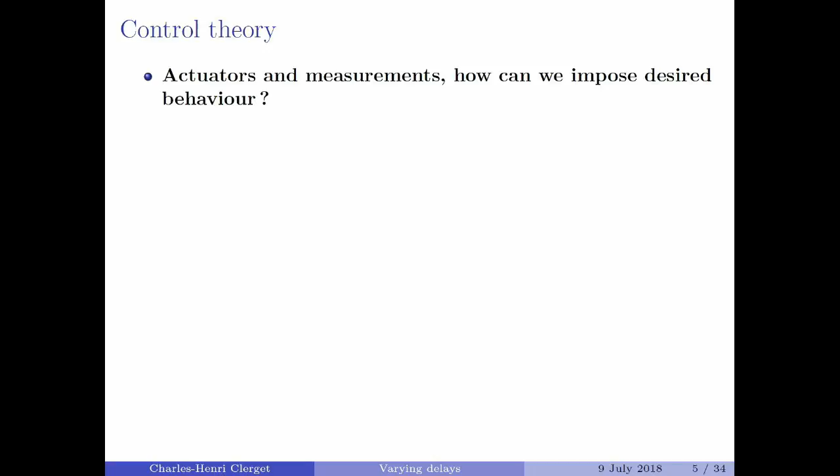So first, a word about control theory. The purpose of control theory is that given a system - maybe a machine, maybe a chemical process, maybe a spacecraft, there can be many different applications - we're given actuators, which are devices that generate some signal we can more or less freely choose. We have some measurements about some states of the system, and the question we're asking ourselves is how can we impose a desired behavior on the system based on that.

Most standard control theory is based on systems modeled dynamically through systems of differential equations, so this is going to be my choice of variables, and these notations are going to be standard throughout the talk. I'll come back to that a bit later. There's a bit of a clash with what you're used to, but for me, x is the state variable, describing the state of the system, and u is the control variable, my leverage, my degree of freedom to make the system do what I want it to do. So this is the most standard formulation.

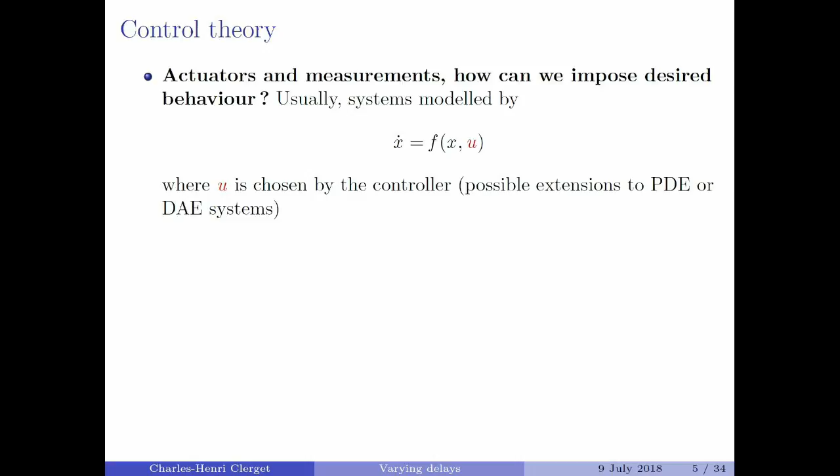There are actually extensions of control theory to systems ruled by PDE equations, for instance wave equations. There's a lot of work on control of systems with hyperbolic PDE equation systems, or DAE systems - differential algebraic equations - which are systems where some of the variables are related to the differential variables through static relations.

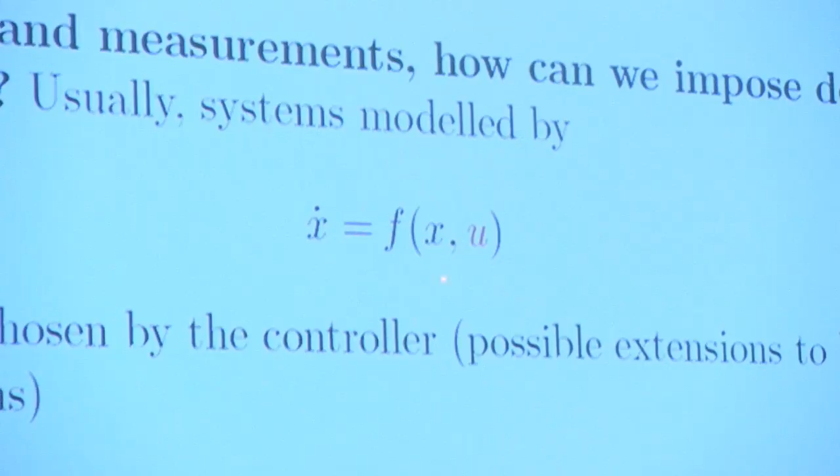So we are trying to stabilize the system only by moving the cart. Obviously, if everything starts in a vertical way, then this is an equilibrium point, but it's very unstable. As soon as we lose perfect symmetry of the system, the perturbation is going to expand, and it's just going to fall down. So in this video, they are regulating it to force it to stabilize the position, and as soon as they turn off the controller, everything falls down because this is an unstable system. This is the kind of thing we more generally try to achieve.

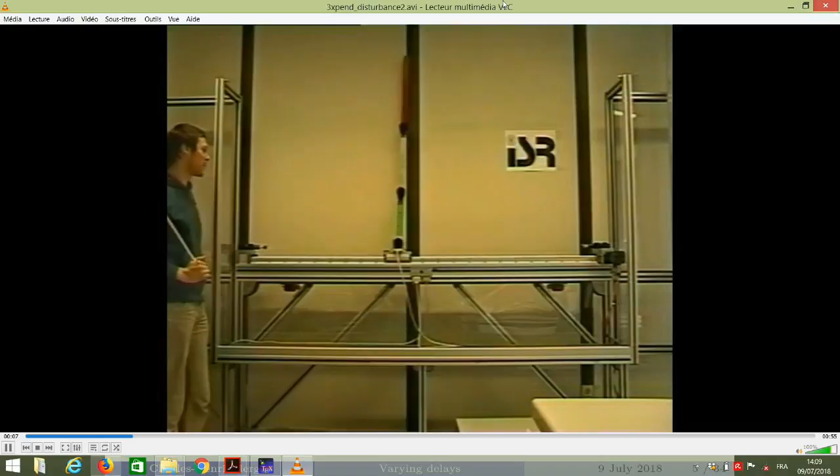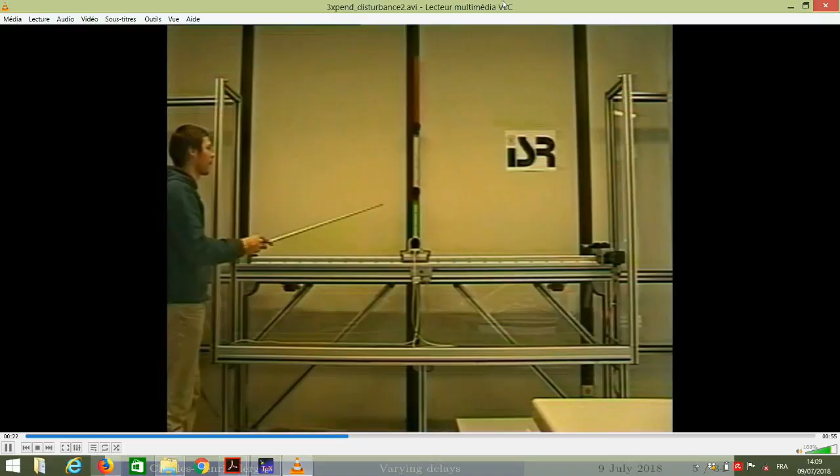Another important question is, we are able to regulate to a given set point, but if we have exterior perturbation or some bias, can we actually correct them? In this example, the researcher imposes a perturbation, and the system needs to fight against it to keep things stable, and slowly gets a bias and slowly comes back to its origin, correcting the bias. Depending on whether I'm hitting here, it takes a lot of work to restabilize the system. If I kick here, it's a bit easier.

Now, another kind of problem we are interested in is motion planning. The problem here is, given a desired trajectory, not a set point, that I'd like to impose onto the system, what is a control trajectory that will allow me to get that?

This is a video from my lab, actually from 20 years ago, where they built this machine which basically inverts the dynamical equation of a robot actuated through 3 motorized linkages, and puts the pendulum in an upside position and keeps it stably there. So these are the main ingredients in control theory.

We could also ask some more fundamental questions, such as, is the system commandable, is it observable, and so on, but I won't dive too much into this today.

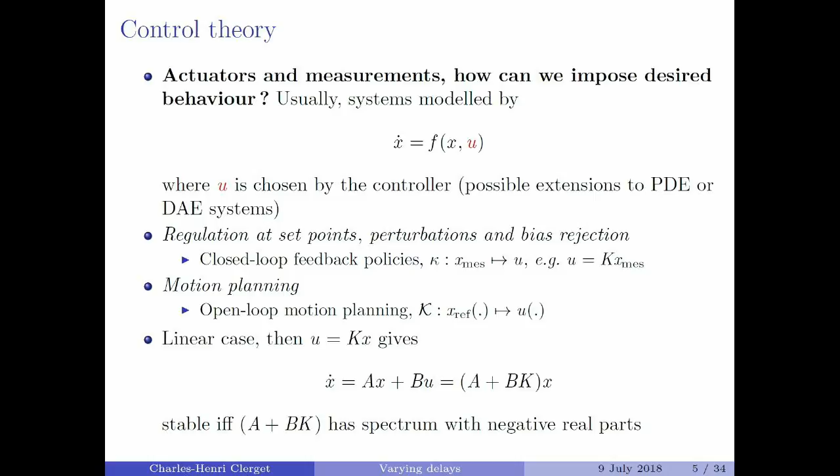To make things a bit more mathematically grounded, let's say the simplest example we could think of is if our system is a linear system, which we usually write like this. So we have linear dynamics with respect to the state and with respect to the command.

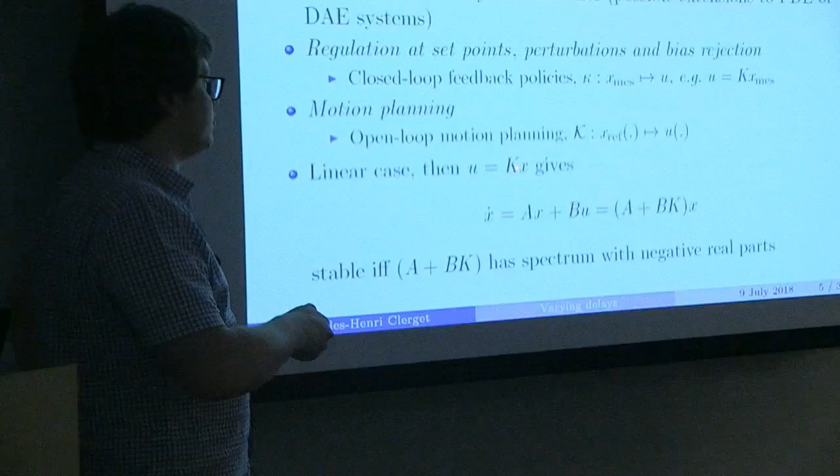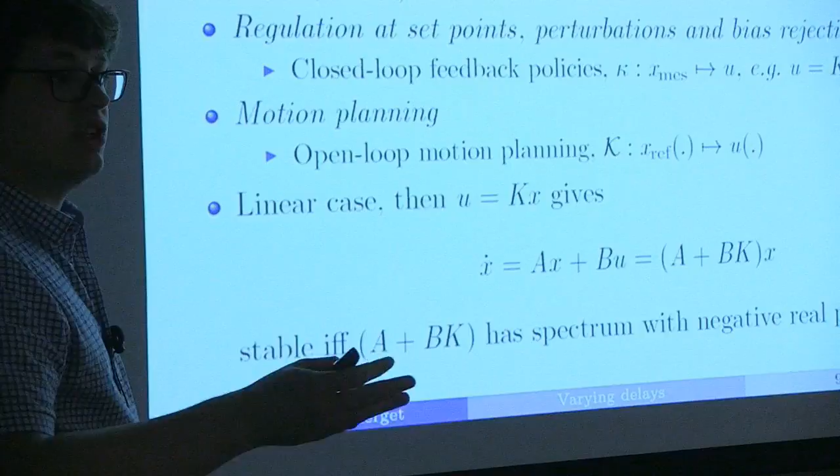Then we try to come up with a linear feedback law. That is to say, the mapping from the measurement I get from my system, to the control action I must take to compensate for whatever discrepancy I find between what I want to achieve and what is actually realized. When we plug that back into the dynamics equation, we get this.

We can very easily see that this system with the linear feedback is stable if and only if this matrix has eigenvalues which have negative, and actually better, strictly negative real parts.

Okay, now I think I don't have any movies, so I can stay here. So this was the general setting.

As I mentioned, control theory is used in many applications. The most notorious ones are probably military applications related to missile guidance, this kind of things, robotics, machine tools, and so on. Another major area of application is control and dynamic optimization of industrial processes.

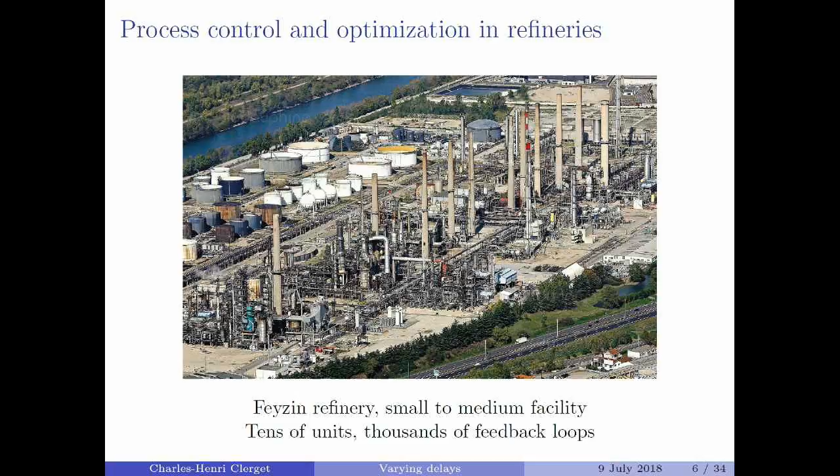In process industry, basically the rule of the game is that you are making commodities out of commodities. Your volumes are huge, your margins are tiny, tiny, tiny, and so whatever tenth of a percent efficiency you can scrap off will make you rich. These are industries which have invested a lot, and for a long time, in control and optimization of their operations, so it's an interesting playground for people in control theory.

This is a view of the refinery where my operational advisor was located. This is in the south of France, nearby Lyon, so it's a small to medium facility. That means it has tens of units and thousands of feedback loops. It's a pretty complicated system, and a big challenge is to try to control and optimize a system like this, which has a lot of feedback loops within it, recycling streams, so a lot of interactions you need to take into account.

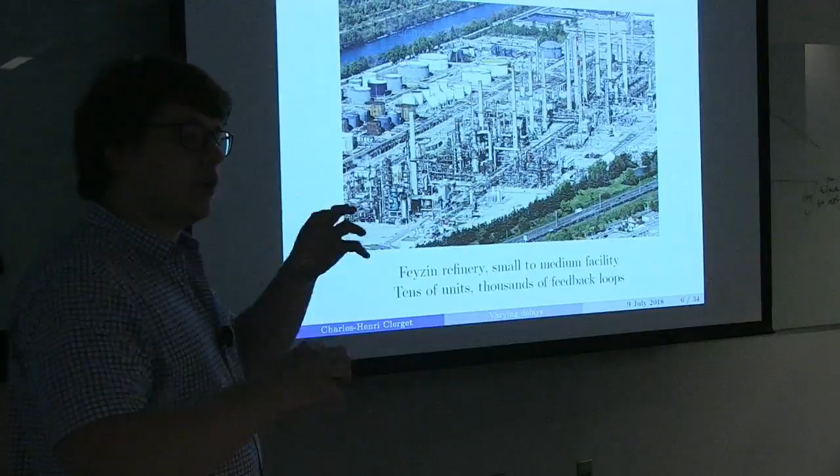And now a word on delay. As I mentioned earlier, my talk will be centered, from the scientific standpoint, on the control system submitted to some specific delays.

The existence of delays - when the ODE ruling the system is actually not an ODE, but rather a delay differential equation - is a pretty old problem in control theory, because you actually find delays in a lot of settings.

Could be computation delays if your controller is a bit slow, could be network communication lags - a lot of instances - and they have a very distinct, actually, have I?

Oh no, okay. That's probably going to be better for everyone, I'm sorry about that.

Delays have a very characteristic effect on dynamics of closed loop systems.

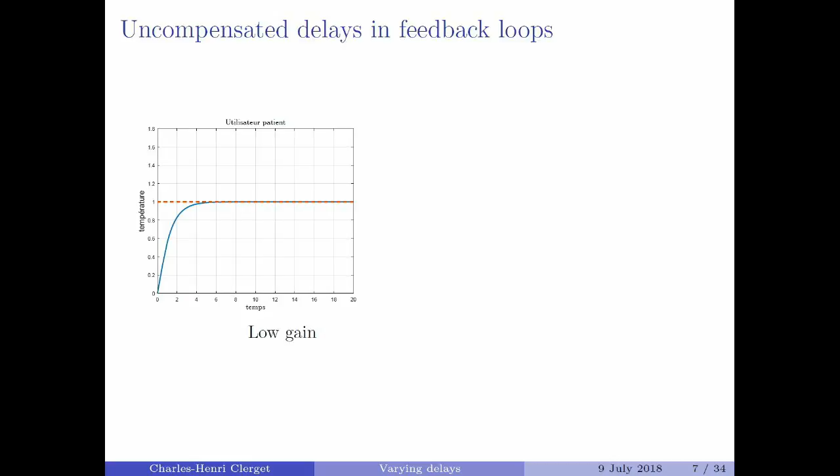So here I've plotted the closed loop evolution of a very simple system where I'm trying to track a target value at 1. In this case I have what we call a low gain. The gain is basically, to make it simple, the proportionality constant between the discrepancy I have on the variables I want to monitor and, based on that, what action I take.

So if I have a high gain for a small discrepancy, I take a big action, and the other way around. Now, as you can see, this works fine, but this is a pretty lame control, actually, in the sense that it takes a lot of time to bring my system up there.

And actually, if you were to look at the equation of the system, there is no real reason to go that slowly. But what I've not told you is that hidden in there is a small delay that I've not accounted for in my control scheme design.

So if I actually try to get my gain larger, to drive my system to the desired reference value faster, then I get this - this sort of spurious oscillatory behavior is very typical of systems with time delays when they are not compensated.

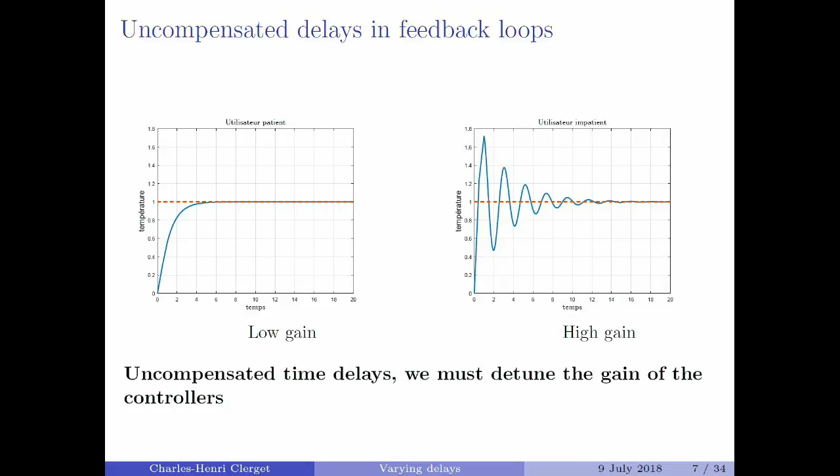So basically the rule for practitioners is that when you have uncompensated time delays in your feedback loops, either you have to live with this kind of spurious oscillation - which we really don't like in process control, because then it excites every other loop in the system and everything starts to oscillate - or you need to detune the gain, and that means you lose performance. So basically all of your controllers are kind of lame, and you have to live with that.

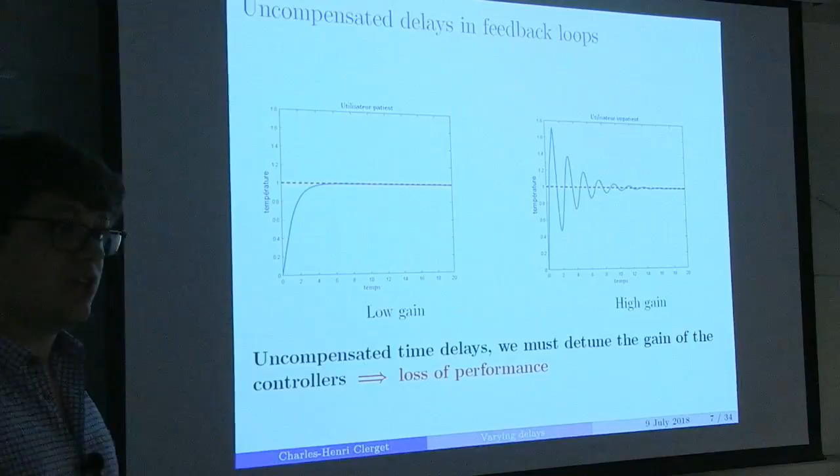And the stake in this talk is for a specific kind of delay that I'm going to detail now - how can we come up with some solution when this delay is complicated to compensate in our feedback.

So, hydraulic delays. Basically what we are talking about today is pipes, essentially. If you look at it from far enough, a refinery is essentially big tanks connected through big pipes.

When the outlet of one tank is the inlet of the next one, this creates - if the pipe is big enough compared to the standard flow rates in the pipe - a transportation delay, which means that what leaves the first tank needs to take some time to go through the pipe and reach the second tank.

And actually, if you look at it from a simplified perspective - that is, if you assume that this transport equation is purely a plug flow model, so an advection equation, can't make it simpler - then you have an analytical solution. In this case, strictly speaking, the action of this transport phenomenon is purely a time delay, whereas the delay itself is a bit complicated.

It's defined implicitly through this integral relation, and this is what we want to be studying today. This is typical of processing plants where we have recycling streams with variable recycling rates, or communication between units which depend on the flow rate at the outlet of one unit. This flow rate is one of the control variables for the upstream unit, but it also affects the communication delays with the downstream units.

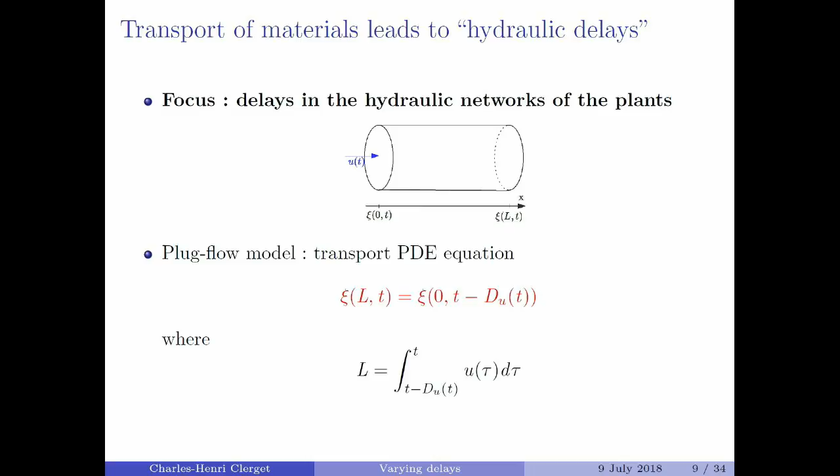This will be made clear when I have the full mathematical formulation, but basically the idea is that our equations are going to encompass some delays, and these delays will be defined through relations of this type.

Before delving into the process side of things, this kind of delay actually happens in other places. Another major application is in engine design, where compared with the speed of the reaction taking place, you have significant delays, for instance, between the combustion chambers and some downstream sensors. So basically you cannot properly control the automated injection.

And an example more up to the point in terms of what Total wants to be doing, another example that could be given and which was studied by a former PhD student in my lab, more than 10 years ago now, is this.

So this is a hydrodesulphurization process. This is basically the process in which the oil refiner takes the sulfur out of the oil, which is what prevents acid rain afterwards. There are very stringent regulations, whether in the US or France, about how much sulfur you can have in the commercial fuel that you sell and eventually burn. This is the kind of unit that helps take that out of your fuel.

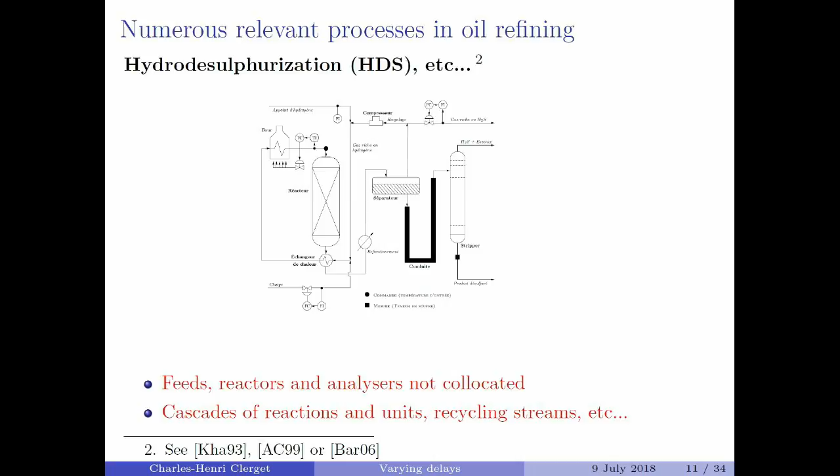As you can see, it's pretty complicated. You have some recycling streams, different units which are, for instance, the separator and the stripper, separated by a significant pipe. We don't measure everything at the same place - some measurements are only done at the end, after significant delays. What's typical in this architecture is that feeds, reactors, and analyzers are not collocated. That means what happens at some point will affect later, after transport, what happens somewhere else, and it might not be measured immediately. Also, as I mentioned, you have cascades of reacting units, recycling streams, and so on.

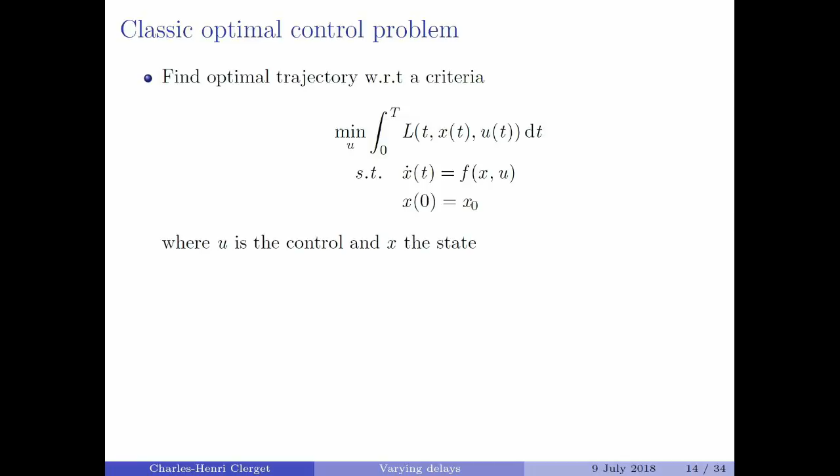Now, more into the mathematical problem statement. First off, there are different ways to go about designing control policies, feedback loops. One of them, which is quite popular for some applications in nonlinear control - what we'd call hard control problems - is called the optimal control problem.

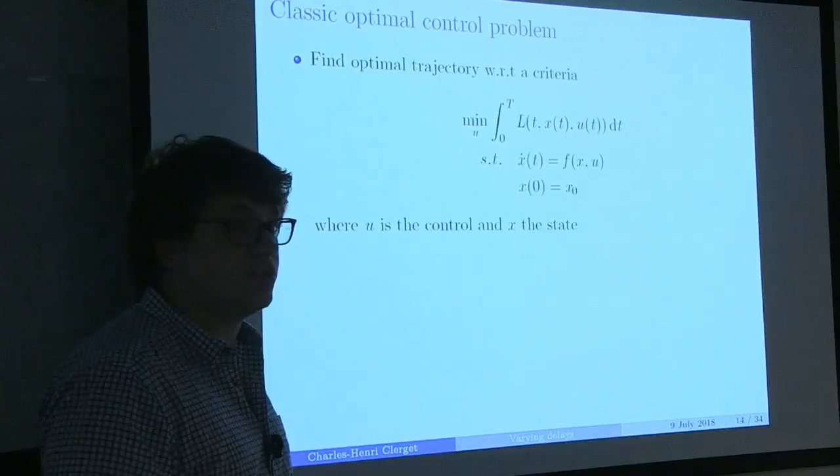I want to pause a moment on this because I think this relates a lot to what you guys do, for instance, in full waveform inversion. In this approach, the way we come up with a control strategy is by solving an optimization problem - we want to minimize over a certain time window a certain criteria which depend on the state and the control input. Usually this L, which doesn't mesh well with what L for you would be, the wave propagation operator - for me I'm going to stick to standard control notation.

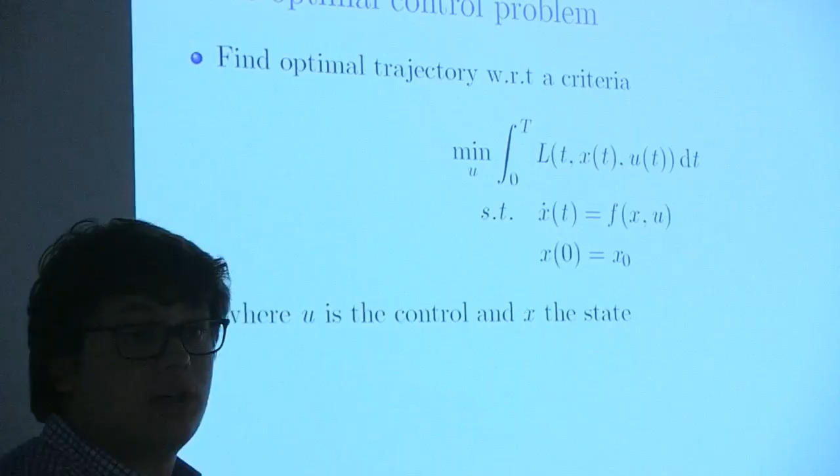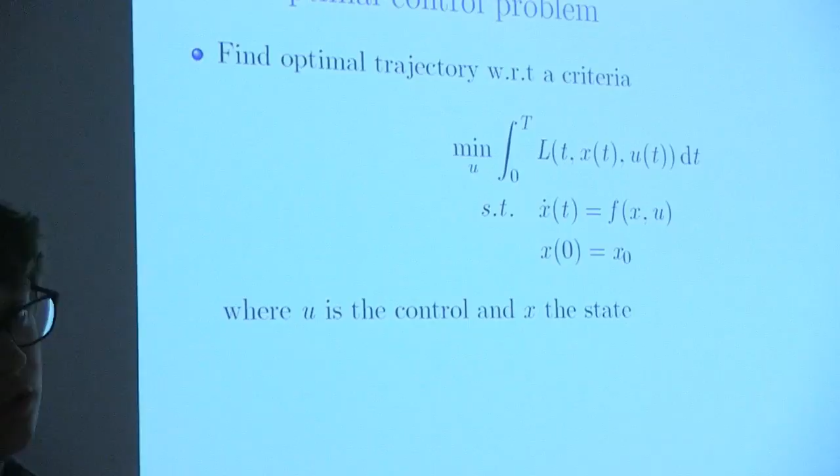Just a comment - the two equations fully define x. Yeah, once u is given, the two equations fully define x. So basically we don't deal with problems that are ill-posed. There's a whole theoretical field in control which studies whether systems are controllable and/or observable, and if they are not, then we just say that's not for us to use.

Your system is misdefined by design, then you need to add more actuators or change the problem - for instance, what could happen is that if you have a simplified model, maybe it will look not controllable or not observable, but if you take into account more complex nonlinear effects, then it becomes so.

But at least we'll go back to, okay, let's sit down again and design a better scheme. So our life is simpler in that sense.

Now, the stationarity condition, basically the condition that a candidate optimum solution of this problem has to verify, is actually, by design, very similar to what you do in FWI.

So you are going to have one equation defining the forward model. Then you have an adjoint equation, which should be familiar to you, and then you have something to which we don't give a name, but which I would call a gradient term. You would see that if you do the scalar product of this thing with the perturbation of control, you would get the sensitivity of the cost, and so at optimum this thing has to be 0.

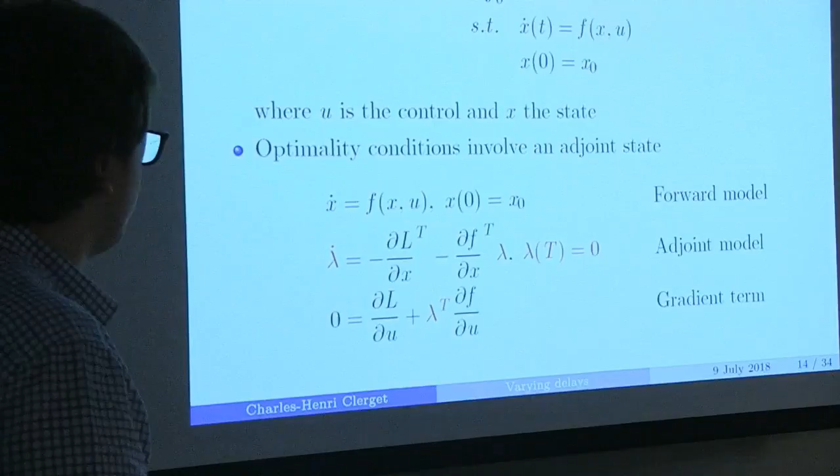So this is pretty similar, and actually I think this theory is what stemmed afterwards what is now used in a lot of data assimilation schemes or FWI, for instance.

Now, specifically for my problem, what we want to be looking at is systems where possibly the dynamics is impacted by delayed value of the states and the command.

We have that this r_u is defined as... is defined through this relation where r_u is equal to the current time minus the delay at this time, which is defined through an integral relation of the type I described earlier. The only difference is that now we take the action of a strictly positive function on the input, to make things a bit more general.

Just a high level question. Whenever you talk about these time delays, the gut reflex is to use Z transform, Laplace transform, Fourier transform, whatever, to account for the time delay. So why can't you do that here?

Because it's only convenient to translate a time delay in the Laplace domain if the time delay is fixed. If it's fixed, then it's really easy. It's just a multiplication by a complex exponential, and then there's a lot of pretty nice theory about that. You see basically what we call the Nyquist diagram turns around, and you can see that when it crosses some points, then you become unstable and such.

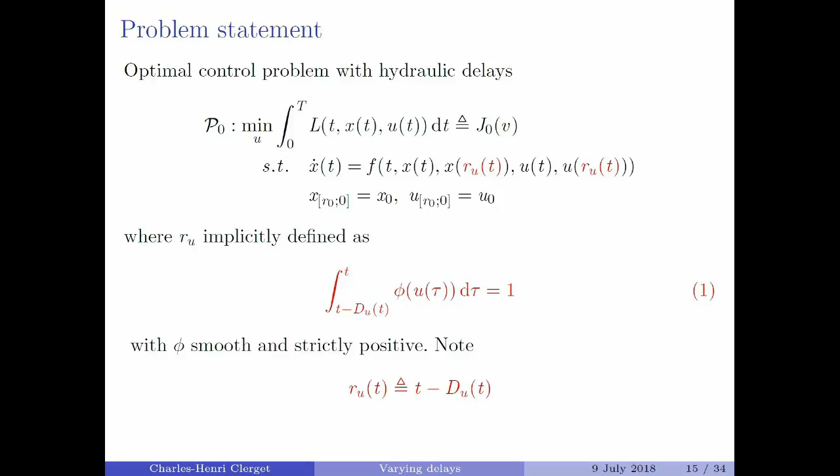Most of what comes next, I will forget about this, because the system we were mostly interested in for what Total was working on was a system where you don't have this, and you only have a delayed input signal and the current input signal.

Now, there are two most traditional ways to solve optimal control problems that are standard in the control literature. One class of families is called indirect methods. These are methods where you start by...

...deriving the stationarity condition of the continuous system. That is basically the stationarity condition that I exposed earlier, and then you try to solve them. You can do it through different ways: gradient descent in the functional space, or if you want to go to second order, shooting methods, continuation methods—there are a whole bunch of them.

It's pretty popular in the control community for, I would say, 3 reasons. First, because it's elegant, which means the math are dirty and complicated, and there's a lot of work to be done there. Second, because they are known, and this is true, to yield very high accuracy, and also because they allow to handle some degenerate problems with singular arcs, which I won't go into the detail of today.

However, when we started working on these problems, the stationarity conditions of this thing had not been investigated for input-dependent delays, so this was a new problem.

The other class of methods are direct methods. Instead of first deriving the stationary conditions and gradient through functional analysis and calculus of variations and then solving that numerically, you first discretize the minimization problem and try to solve it as a nonlinear program, typically using orthogonal collocation methods. This is the method usually preferred in the process systems engineering community.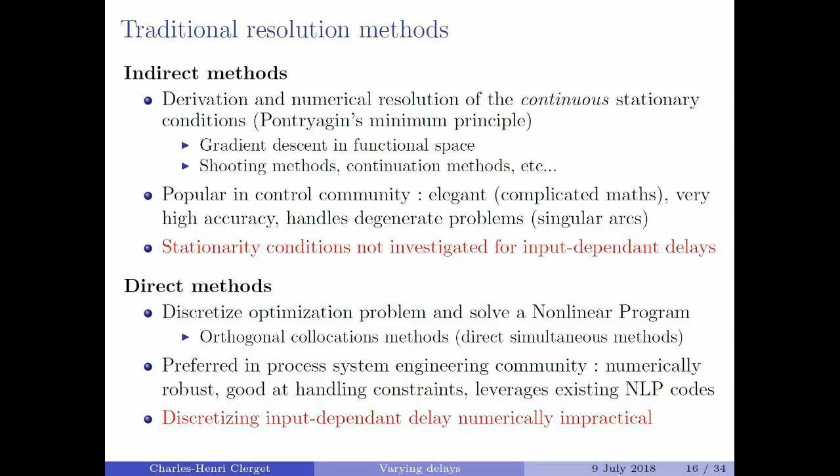Now the problem is that when you try to do the discretization of this problem with input-dependent delays, it turns out to be numerically very impractical. Interestingly, if the delay was variable in time but in a way that is a priori fixed, it's pretty straightforward to apply these methods, but with the input dependency, it becomes much more involved, and we did not really know how to do that.

So this brings us to the steps we took to try to address the problem. First, we wanted to characterize the solution of the problem, meaning running basic calculus of variations for the problem with input-dependent delay, which had not been done before.

I won't go into the details, but I think most of those working on this are familiar with this: you define an extended cost function which includes a Lagrange multiplier with the dynamical constraints, and you say that to find a candidate optimal solution, you necessarily have to satisfy three Gateaux differential derivative relations, meaning that at an optimal solution, the first variation of the cost has to be stationary.

When you do that, it's pretty technical, but you find out that the problem, as I laid it down before, is actually non-Gateaux differentiable. That's pretty bad, because it means the problem is not smooth. Any optimization method predicated on using gradients will fail, which is pretty bad. Since these problems after discretization are big enough, we do not want to resort to non-smooth optimization methods. This was surprising to us and a problem we had to overcome.

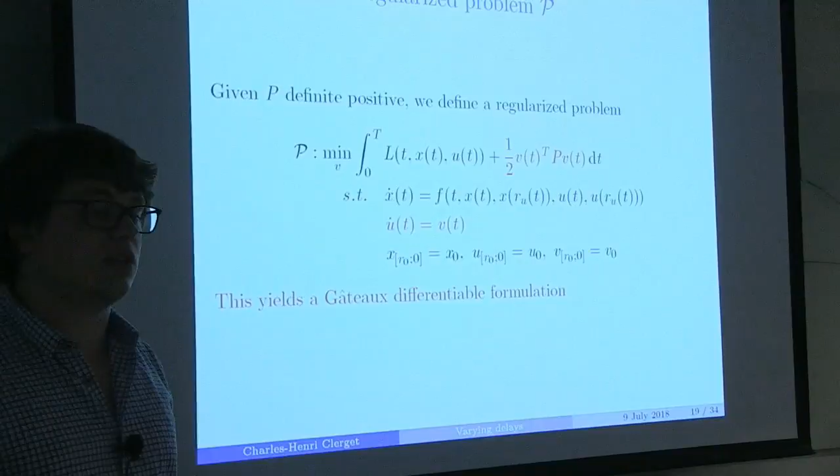But basically the problem is that what is important about this is that by introducing this term and this term, I make u a continuous, actually differentiable function, whereas before u was discontinuous, which raised the differentiability problem. And this quadratic term is just there to make sure the problem is well defined, so that the problem is strictly convex with respect to v.

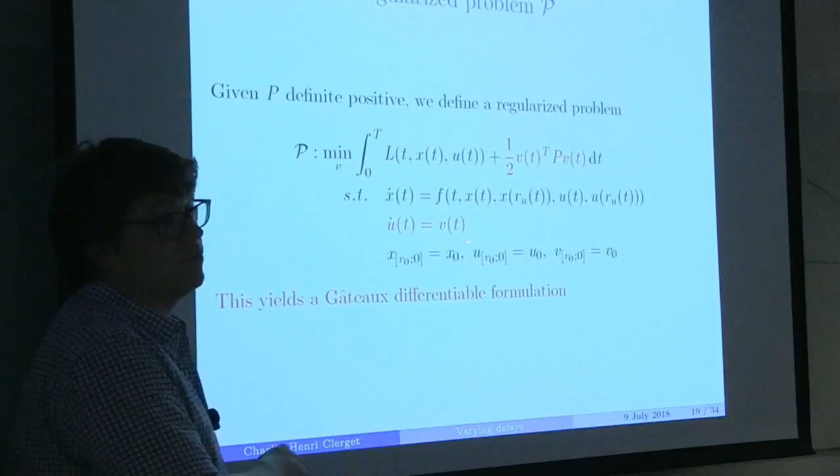The truly important stuff is this guy. So now we understand that the stationarity conditions of this problem are not so different from those of a problem we would know how to solve, which would be varying delays, but varying in a way which does not depend on the input. And the additional terms just boil down to this.

Okay. Now this leads us to proposing an iterative resolution algorithm. So the main idea was: this is a problem we'd like to solve now, because thanks to this regularization, this is well posed, in the sense that it's smooth enough that we can apply the whole bunch of approaches we're used to.

Now, we don't know how to deal with this guy numerically. So would it be possible to solve a sequence of simpler auxiliary problems that we would know how to solve efficiently, which would eventually converge to what we want? The naive idea is to say, okay, we'll create a sequence of problems where at every step we fix the value of the delay law based on the last value of the control input, and we'll just solve that iteratively, and hopefully we'll converge, and this will give us something meaningful.

Now, this is nice, because this guy, as I mentioned earlier, I know how to solve using collocation methods, which are typically what I want given the prerequisites of my problem. The problem is that this is actually wrong, precisely for the reason I outlined before, because if we do this, these terms always vanish. They're never taken into account. So if you do converge to a solution, which is not even clear, you know necessarily it will be biased, because this term will not be present in your stationarity condition. So this looks nice, but it's actually not very smart.

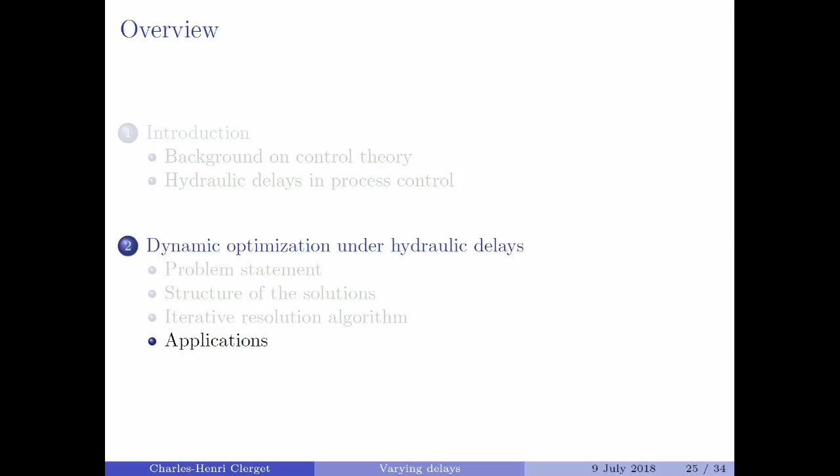That's actually a tough question. So in this case, and that's a proof we made because basically we finalized this a couple of months before I defended my PhD. So then again, in the interest of time, I kept alpha constant. So the results say, at the end of the day, the theorem says that if alpha, there exists an alpha big enough under some smoothness conditions which are standard, there is an alpha big enough that this will work.

Now this is interesting because it was not obvious from the beginning that the delay equations would be smooth enough that this would still be working. So we are happy about that. But this is not very practical indeed.

So you have a couple of ways to deal with it. I've actually not been very far into technical developments on how to choose it. So you could either try one alpha, which for whatever reason you like, and if it converges, then you're happy. If it doesn't converge, then you take it bigger because you know that eventually it's going to work. So that's not very good.

Actually, I think the proper way to go about it, and the way I heuristically implement it in my actual solver, is to do the same thing as trust region method. So basically, you need a metric of what is the discrepancy between the cost reduction that you expected to get and what you actually get. And if this matches well enough, then you say that your local approximation is good, and you get alpha smaller.

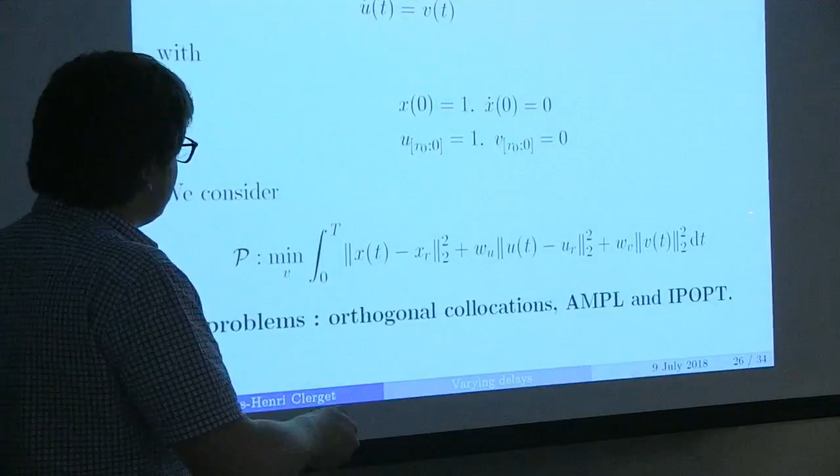The Julia equivalent of this is JuMP. Basically it allows you to write down your optimization problem, the algebraic constraints, and it will do all the automatic differentiation for you. After that, you can just plug it into your solver, which makes your life much, much easier.

And actually it's important because in this kind of method we do need the Hessian. The algorithm to solve the optimization problem works with the Hessian because we want fast convergence, and our problems aren't so big that we can't afford to store or compute it.

So we really don't want to be doing this by hand all over the place. IPOpt is state-of-the-art, large-scale constrained nonlinear optimization software, developed by a chemical engineering professor at Carnegie Mellon University.

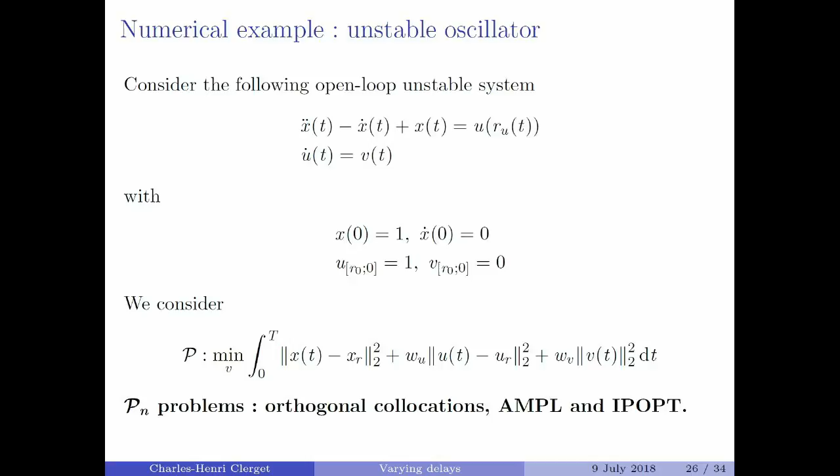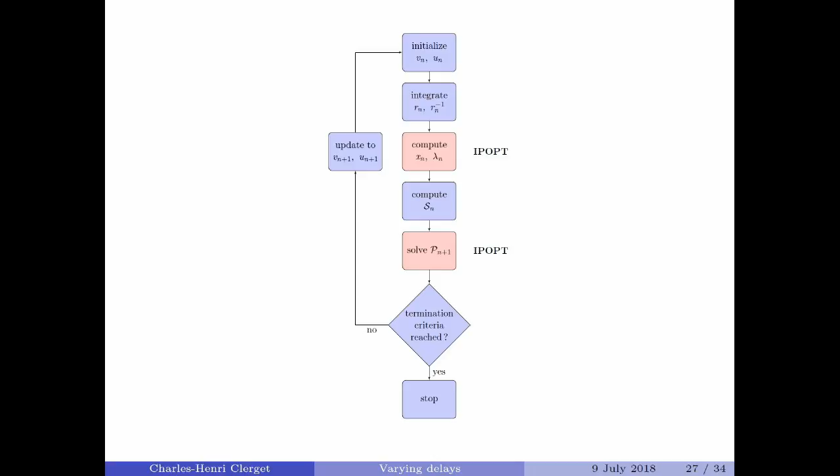Okay, so this is a chart diagram. First we initialize with some value for Vn. This allows you to get a Un straightforwardly by integrating. Then we compute for these values

the delay law Rn. I haven't talked about this, but if you go back to the stationarity condition, you'd see that the reciprocal projection, basically the inverse of this function, is also used, so we need to compute it. Then we run one pass of IPOpt to get the xn and the adjoint for these values based on the stationarity condition.

We compute the sensitivity term, then solve the next n+1 problem. Then we have some termination criteria: if we're happy with what we've got, we stop; otherwise, we just plug it back in. And this is the kind of solution we get.

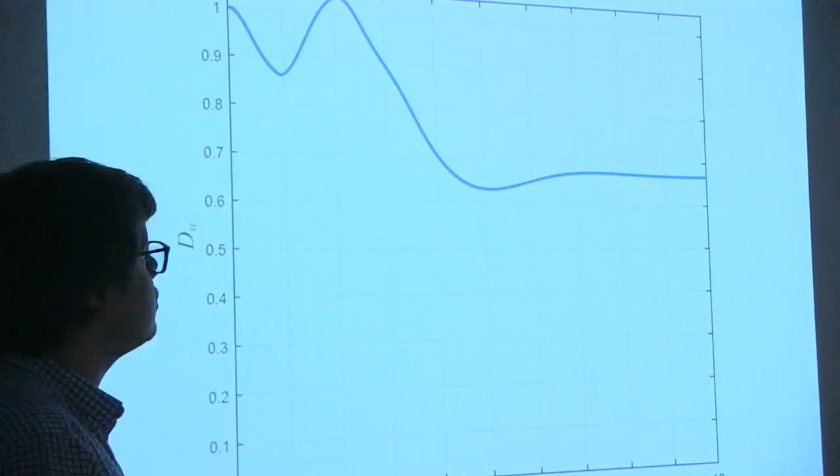So this shows you the way the value of the delay changes over the trajectory. You have a substantial change, the amplitude of variation is about 35-40%. This is a situation which would be pretty difficult to handle with standard control tools if you want good performance. So we're also happy with that.

This is just to illustrate the way the solution converges towards a solution, asymptotically. So U1 is the initialization, so we just have a fixed state where we don't move from the initial coordinates.

Then at 5 we are roughly getting the shape, but we are not quite there yet. At 35 we're pretty good, and then we get into the problem that our approximation is first order approximation and not second order approximation, which means that the final convergence takes forever.

So if you want to be really close to what would be the best I can get for the optimal solution, which is the blue curve, you need 30 more iterations to get from here to this. So this is also one of the drawbacks of what we did, which is that if you want the rough shape of the curve, you get it quick enough. If you want it very fine, it takes longer.

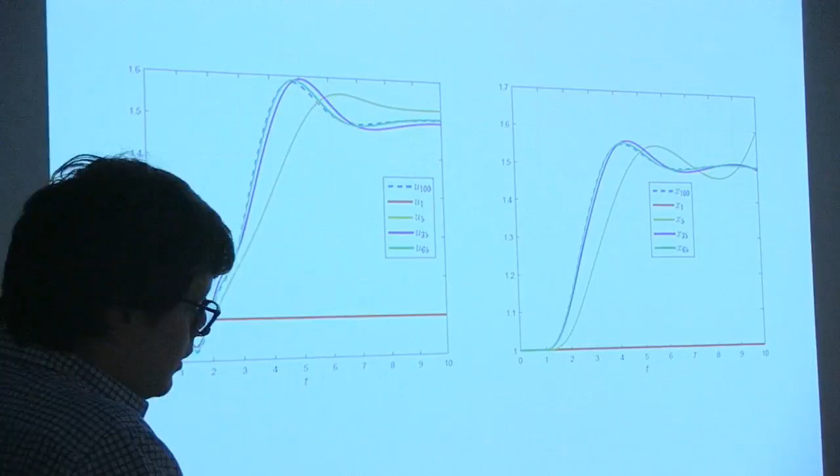But this is expected from a first order method.

Now the second problem, which we have communicated quite a bit on in our publications, is somewhere in between a toy problem and what we might be interested in industrially. This is what I call the paint problem. So you have 3 batches of paint here, here, here. Let's say this is blue, red, and yellow. These two are pre-mixed here, and then go through a pipe of given volume, end up at the outlet, fall into a big batch, and we have this color which arrives directly here.

This is because basically building a pipe is expensive and it takes a lot of space. So in a real plant we want to factorize as much as we can, and so you end up with very strange mixing and hydraulic structures where things get mixed ahead of time.

Basically what we would like to be doing is at any given time control what is the composition in terms of these 2 colors of the outlet here. We could also want to control the integrated batch, but for today I just do the simulation on the instantaneous output because this is a bit more intuitive, I think.

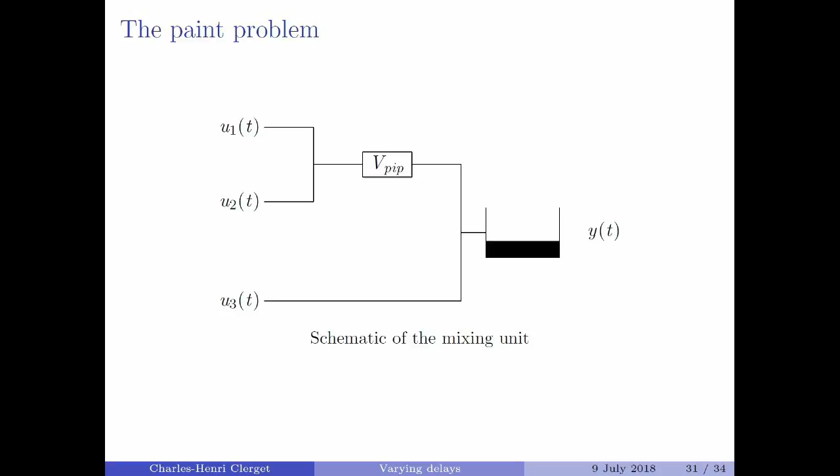Now, given this dashed reference trajectory we'd like, this would just give this. So this is what I call the naive input, without giving yourself too much work. And this is what you actually get at the output of the system if you actually try to implement that, because you do have delays. So what you can see is that the transient is really very sloppy, and it takes forever. You need to have converged to a new steady state so that you can hope that you are hitting the target. So this is really bad, and this is actually what is done most of the time.

Then a first step toward making things better would be to say, okay, there is a delay, it's varying, but we don't know how to handle that. So let's just say it's a fixed delay. Let's take a reference value which will be computed based on the delay at the beginning of the time horizon, and let's optimize based on that. So this gives already a more complex solution.

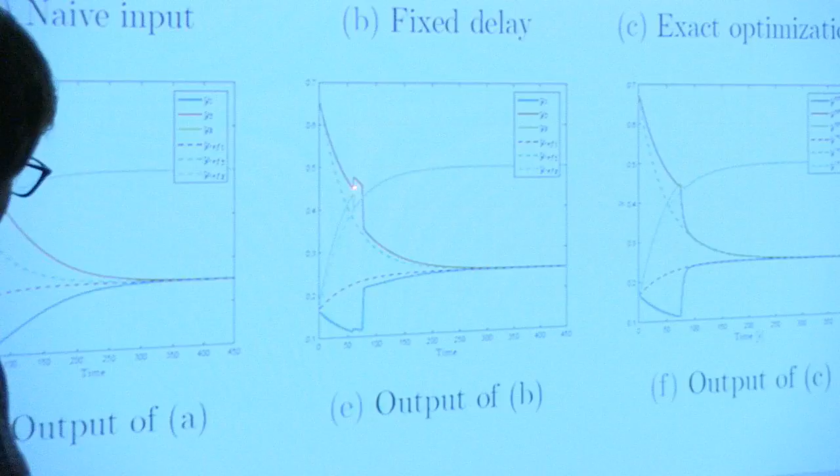And here's what you get. So what you can see is that you have some mis-synchronization problem, like you have this big strange kick happening, because at this point the delay has already changed, so you are making a big change a bit ahead of time. So you have this kick at the beginning which we don't like too much.

There is a bit of discrepancy afterwards, but it's already better. And then you have our method, where the trajectories are more regular than here. This is because in these two cases I didn't need to make any regularity assumption on the control, but now I have to be able to run my algorithm.

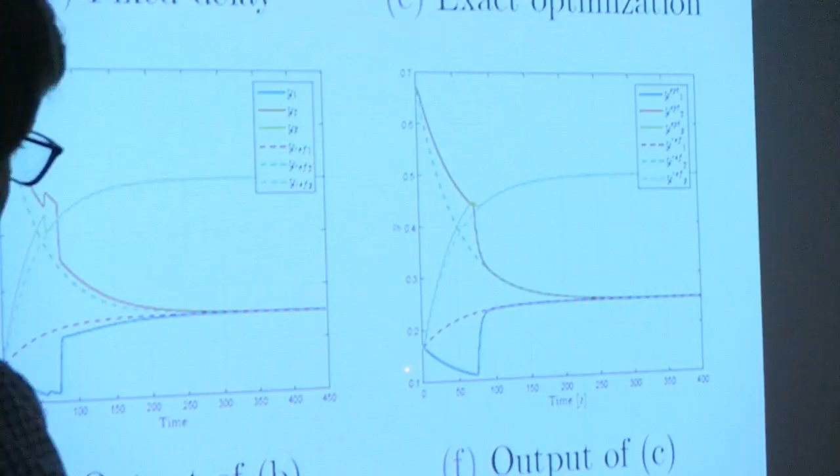And this exact optimization looks like the fixed delay case, but not quite the same. And actually, if you look at the output, this will allow you modulo the regularization of the inputs, which means you can't have a discontinuity on the input. This will allow you to have perfect control - basically, once you've flushed out the pipe, your system becomes controllable and you just hit the target.

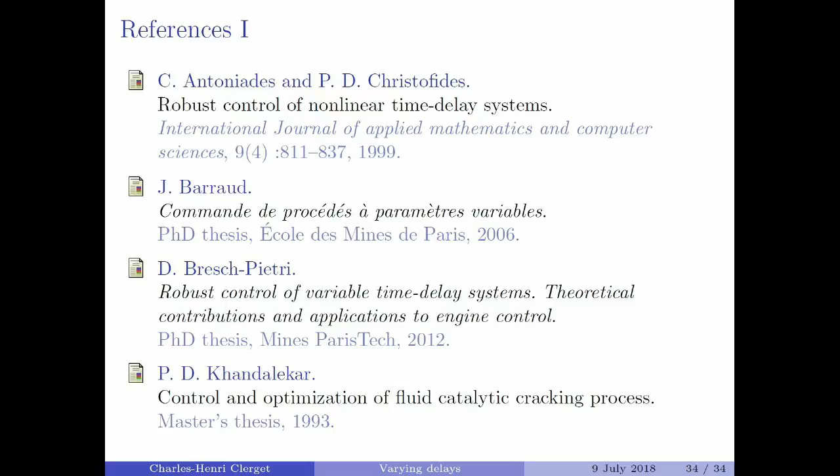Thank you for your time, and if you have any further question, we can go back to the dirty calculus of variations if you like. If you have any other question, feel free to ask. Thank you.

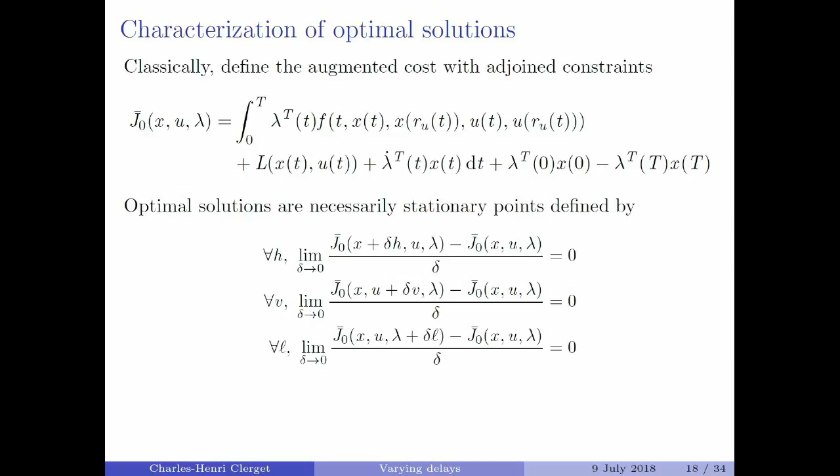So actually, I'm not so familiar. I've not done enough PDE analysis, so what I can tell you is... is it here? Yes, here. So this problem, it's continuous, but it's not differentiable, if you just remove the regularization. I don't know if that answers your question. So I wouldn't know - continuous could be this, or have a cusp.

No, okay, so it's more going to be like... no, it's not going to explode, it's more like - basically you are trying to optimize an absolute value. Except that you have this non-differentiability everywhere, and so it's annoying.

Was there another question? Yeah. So in the iterative algorithm, when you obtain V n plus 1, you need to solve another optimization problem. So is that you exactly solve the problem? Can you repeat your question again, please? Yeah, so here, when you compute V n plus 1, you minimize over V n plus 1, right? So, do you solve this problem exactly, or?

So the question is, do I do just a gradient step on this, or do I solve this thing completely? So the way we did it - that's also a good question - the way we did it is we actually solve this to optimality and then move on. It's not clear it's the smartest way to go about it. It may not be worth, like going through the pain of actually solving things.

The reason why it still made sense for us - the bottom line is, I'm not sure it's the best way to do it. For us, it worked well, probably because most of the nonlinearity was lurking in the delay rather than something else. But it's not obvious that it's what you should do. You could just try to solve this, do the first step, and then move on.

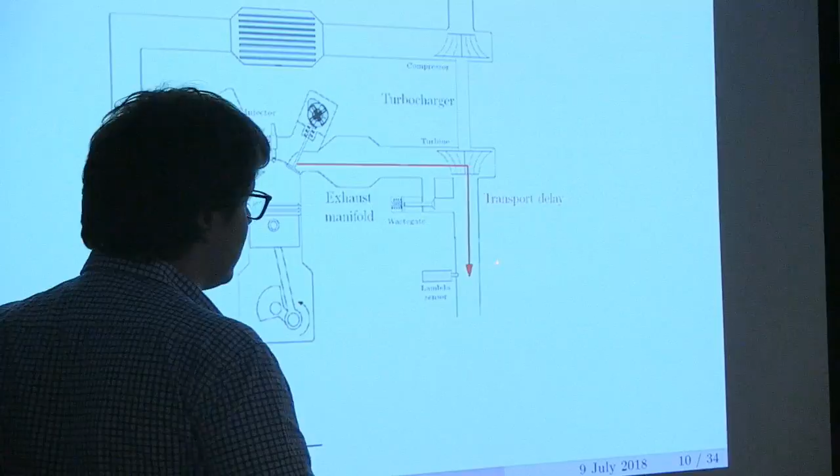What happens is you have a lag between the measurement and what you're trying to measure - how the combustion took place in the chamber. Depending on the regime you're in, the inlet flow rate is different, and this affects the lag a lot. So if you're at low regime, the lag becomes pretty big, and if you don't account for that in the design of your controller, you're not able to do a clean stoichiometric injection. This is pretty important.

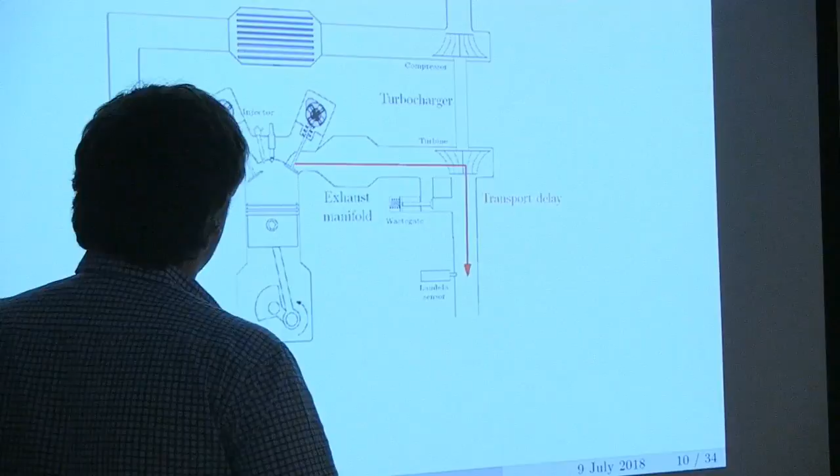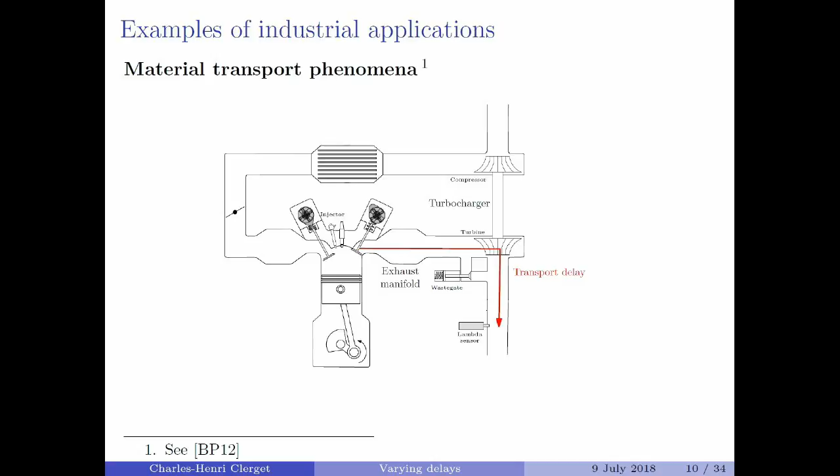What about in the natural world? Because there's usually not a control system - control systems have to do with machines. Does this kind of analysis or description apply to natural phenomena at all, or only to things where there's some artifice and intention?

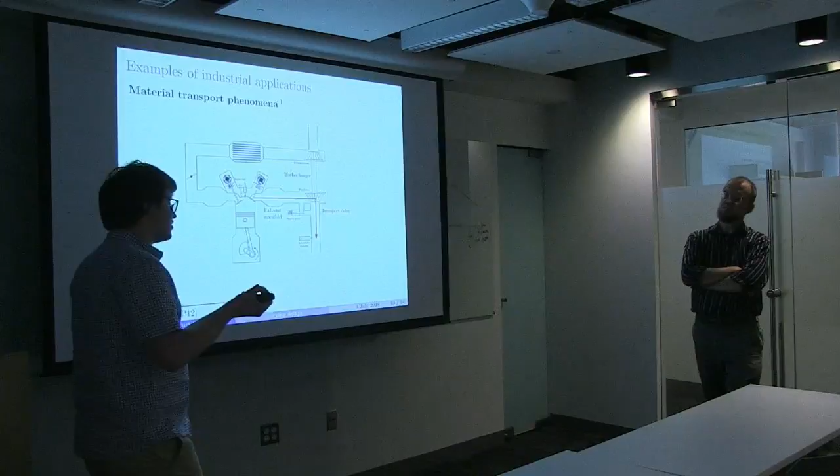To some extent, but in a much more complicated way. Inverting the wave equation looks a lot like that, because instead of looking for the speed of the advection equation which gives me what I want, or at least doesn't perturb what I'm doing, what you're doing when inverting the wave equation is also trying to fit the speed, but of a more complex hyperbolic equation, not an advection equation. I've actually been thinking about this recently.

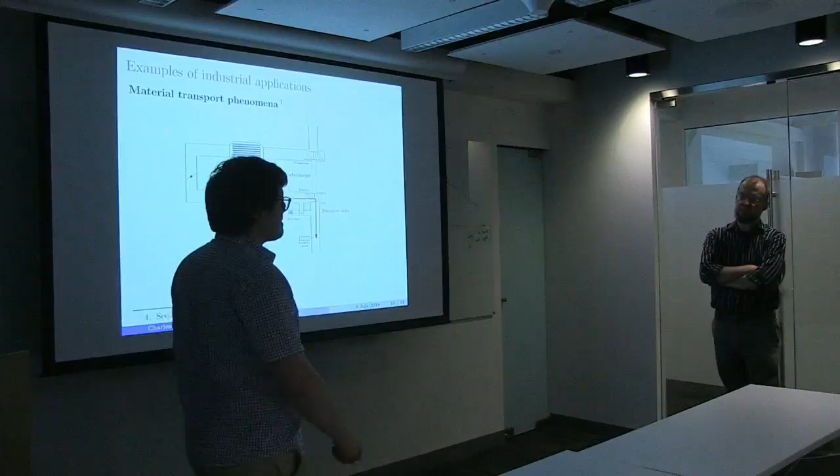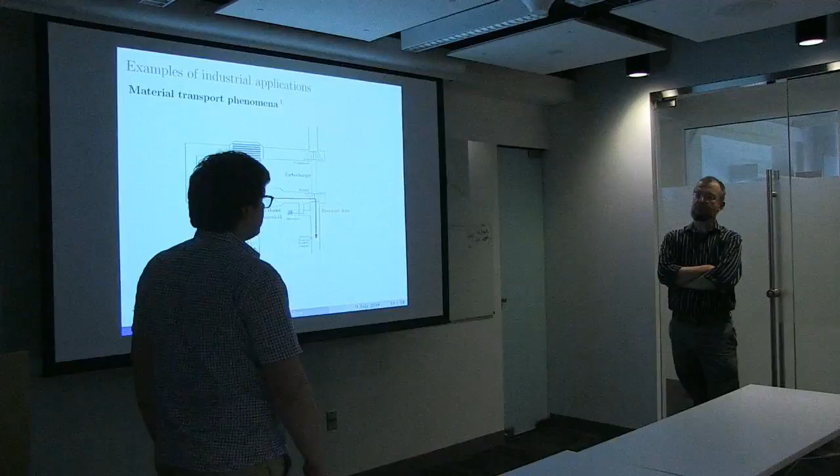Think of the speed as a control input? In my case, no, in the wave - what you do in FWI is try to find a field of velocity that plays the role of speed, fitting your measurements. So the field of velocity is your control variable, in my language. It's a bit improper to say that, but let's stick with it. You're trying to adjust it so that instead of bringing the state where you want it, you're trying to match your observations with what you've actually seen.

My case is in a sense much simpler because my equation is super simple - it's just an advection equation, not a wave equation. Then, this kind of problem...

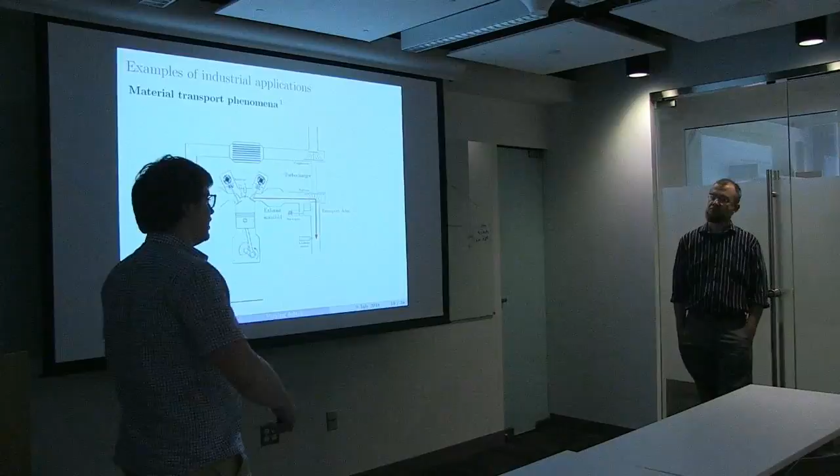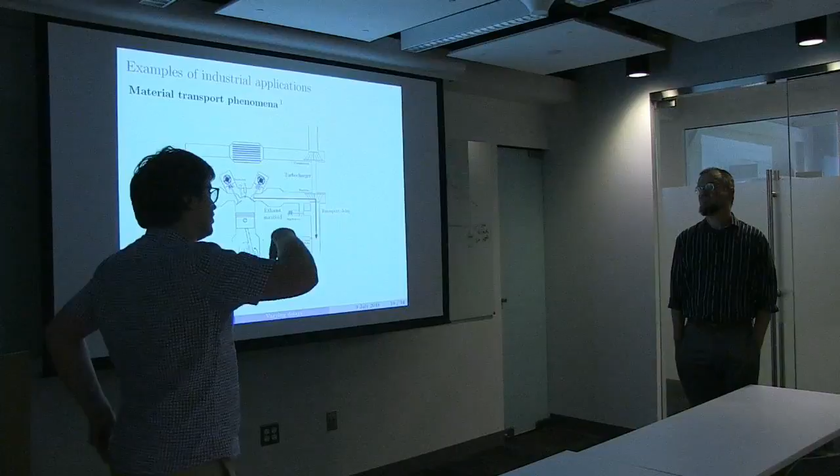I know my PhD advisor is talking to people at Statoil, now Equinor, about regulation of the mud - without going into too much detail, they're not allowed to talk about it. But basically, you inject mud during the drilling process, and this mud is recirculated, and you get pretty much exactly the same kind of dynamics, where what you're doing at some point, depending on the flow rate, impacts the speed at which things circle back.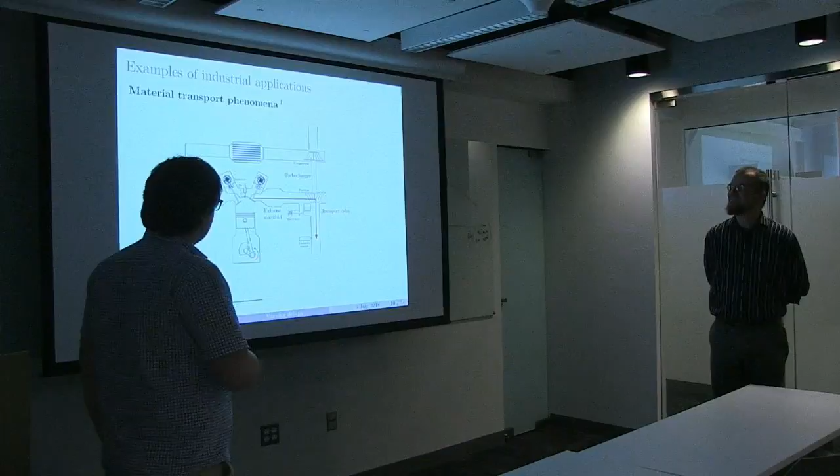I think it's more of a machine-oriented problem, honestly, in the sense that this advection equation is a very simplified representation of some transport processes. In engine engineering, it's also used to model distributed systems - like when you're trying to capture pollutant particles on a catalyst bed at the outlet of the car. The state of the catalyst is a PDE, but it's been shown you can capture it pretty well with a reduced order model using this kind of plug flow with variable speed approximation.

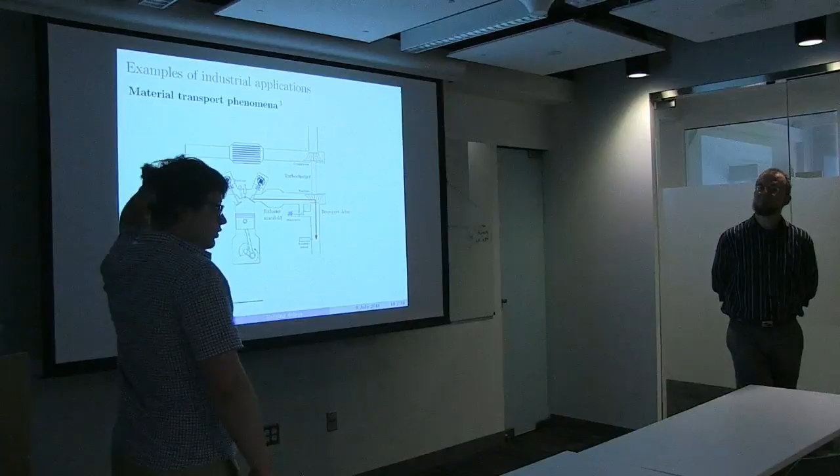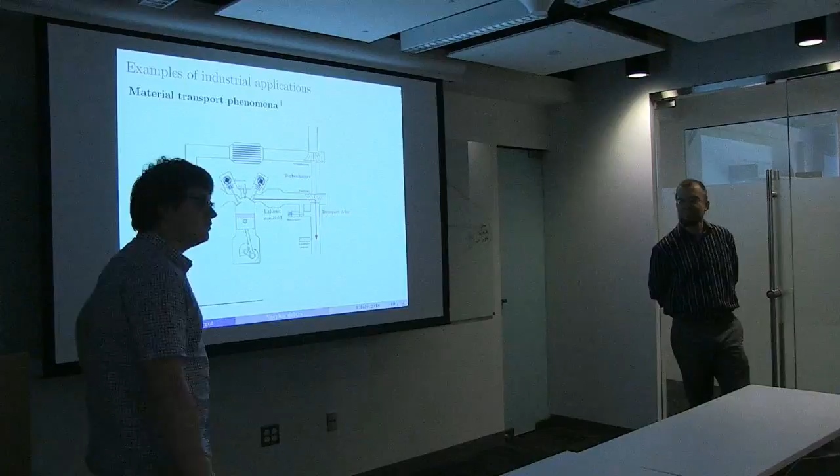So if you want something more complex than what was purely done for this, there are some instances where you can try to use it to build a reduced order model of a more complicated distributed equation. Great, I'd say that. Any other last questions?

Very simple question - can you explain a bit about your final result, why one result is better? You're talking about the paint problem? Okay, let me see how well you can see from where you stand.

These dashed lines are the output trajectories you'd like to follow. Basically, in process engineering we'd call this a grade transition. You are working at one set point where everything was running at these levels for a long time, and you want to move it to something else. You want the transient to be not too sloppy.

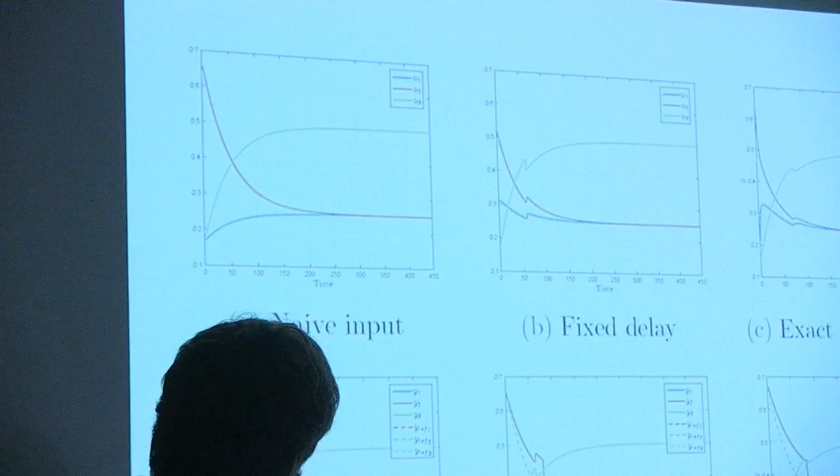That's your goal. Now, if you do what I call the naive control strategy, you get this: the red should be on this dashed green line, and it's not, it's way off. Same thing, the blue is very off. The yellow is not off because it's directly plugged into the output and there's no pre-blend on this one. But the two others are really bad, and they stay bad for a long time.

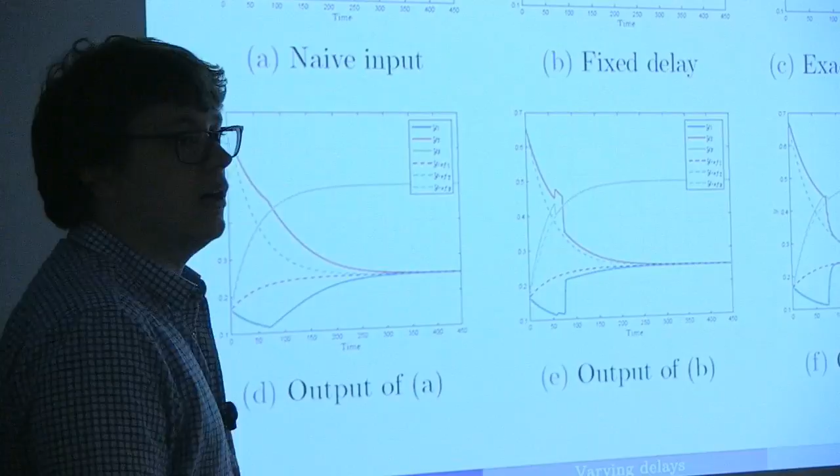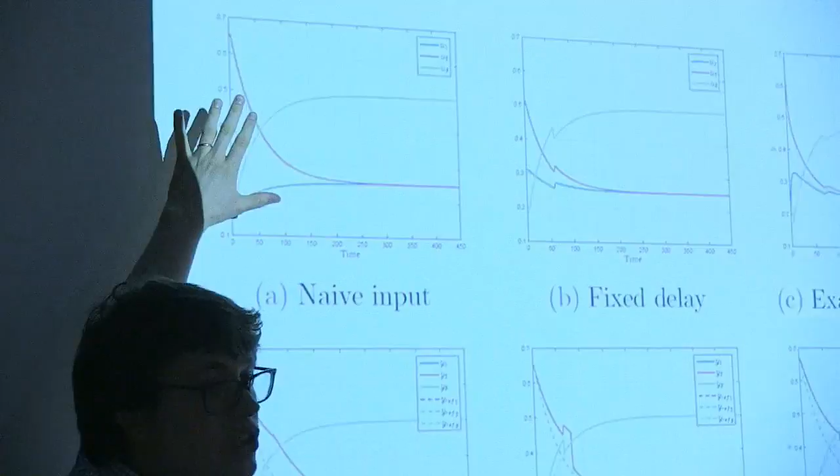That means that if you implement that in open loop in a plant, you are not controlling anything about what's going on between two steady states. For instance, this was the input you needed to produce a chemical, and market conditions are changing. Your boss changes mind, anything. You need to change the chemical you are producing, which means changing the inlet ratio, the ratios of the different components in the blend.

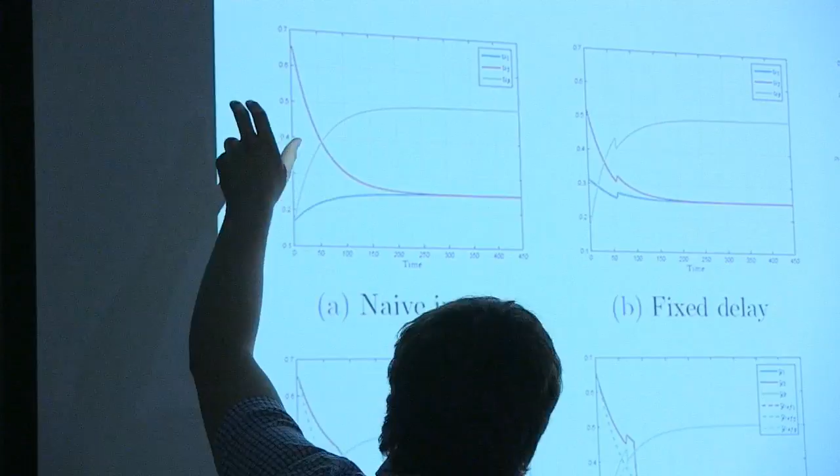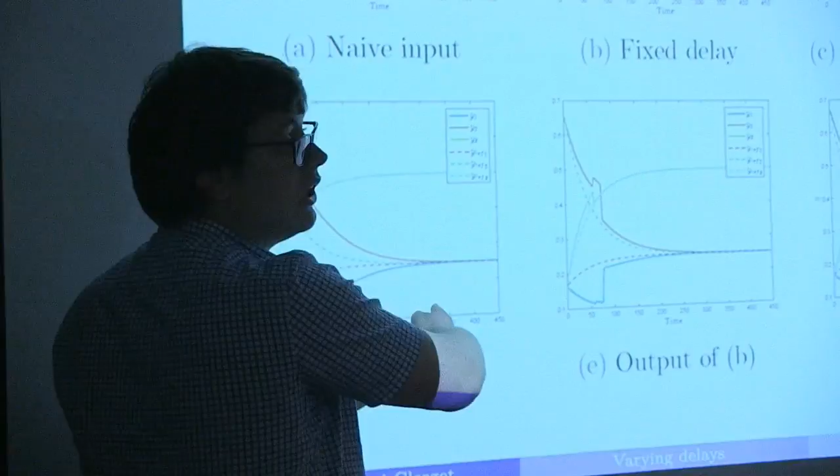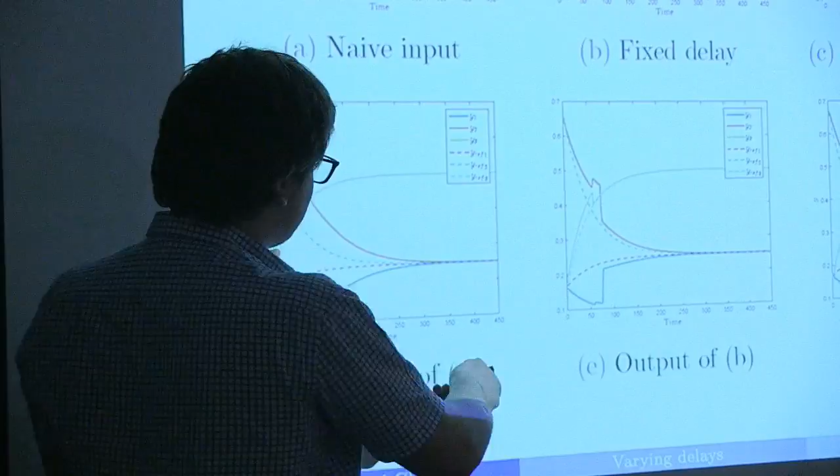If you do this, everything which happens between these two points is essentially crap. It's completely off spec, and you're not going to be able to sell it. Possibly you have to recycle it into the plant because you can't afford to just dump it. So at best you have wasted your time, at worst you have wasted your time and product.

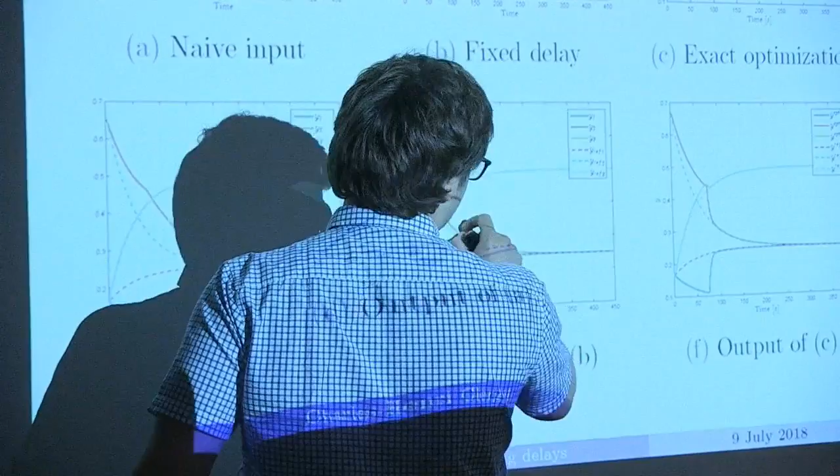If you do this instead, you're much closer. Instead of reaching more or less what you want here, you do it a bit earlier. In the meantime, in this part, you are off, but you are less off. And in this case, you are just at the target from here. So it's all about

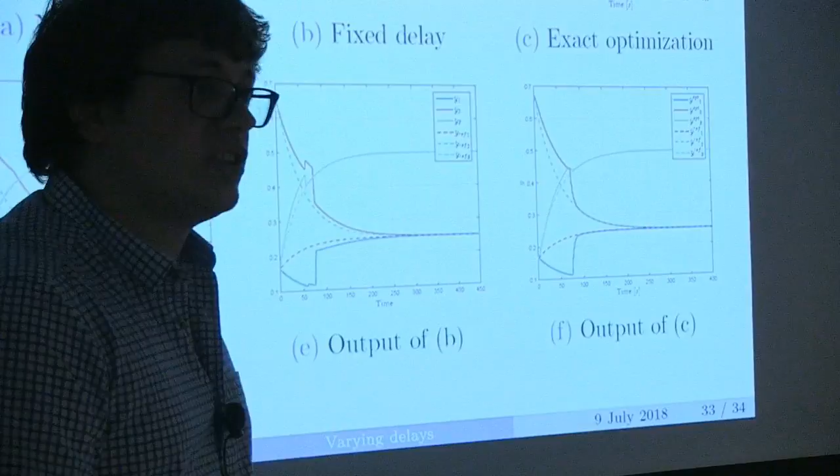not wasting time. Basically, as much as when you run a big chemical plant, you want it to run continuous. You want to start it up one day and then have it run forever at the same conditions. If you are producing ammonia, for instance, that's fine, because essentially your inputs are always the same, your output is always the same, it's ammonia.

As much as you can, you just run it for 10 years without touching anything, and that makes everyone's life much easier. Now, one of the problems when you do refining is that your input is changing, because depending on what is the last cargo of crude oil you got, this completely changes the components that you have in the barrel, and this completely changes the economics of the refinery. You need to change all the set points, and also because there are many different kinds of final product that you could be selling.

You could be doing naphtha, kerosene, gasoline, diesel, light fuels, heavy fuels, coke. There are a lot of things that you could be doing, and depending on the price of energy utilities, on the spot price of the product, it's not clear which one you should be doing. You earn a lot of money if you are able to have flexibility along your production chain, and usually being able to deal with transients in a nice way is an important element to achieve that.